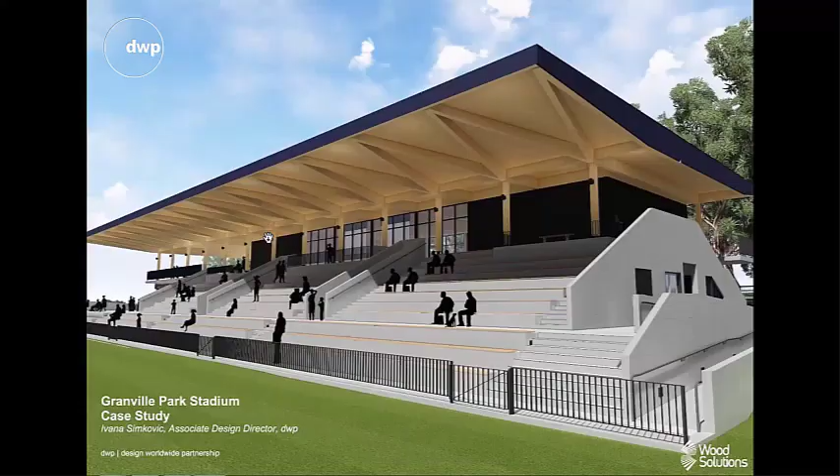Okay, so I will be presenting Granville Park Stadium. The architect is Design Worldwide Partnership. Structural engineer is Northrop Consulting Engineers. The builder is Belmadar, client Cumberland City Council, timber supplier Rubner Holzbau, and completion will be end of this month.

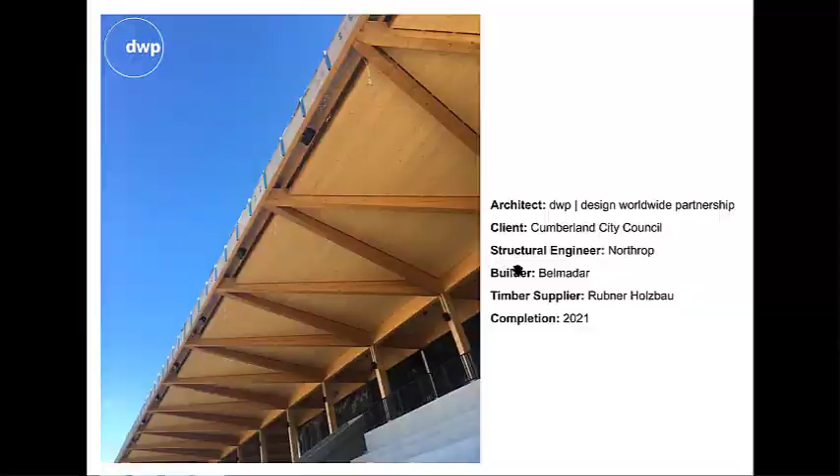Granville Park Stadium, now named the Eric Tweedale Stadium, is situated in Granville, Merrylands area, around 20 kilometres west of Sydney CBD and 2 kilometres south of Parramatta. It is situated in Granville Park between the busy Woodville Road and Merrylands train station, and is considered by Council as a facility that will address the severe shortfall of community recreational facilities in the Granville area.

The stadium is integrated with the existing parks, playing fields, water splash park, shared pathways, and outdoor recreational facilities. The project evolved out of Council's open space and recreational strategy, which determined the need for improved social infrastructure in Granville - an urban requirement for a multi-purpose community facility with flexible space for a wide range of activities and programs.

The project has also been well supported through community consultation undertaken before DWP's engagement. The location for Granville Park Stadium and proposed model briefed by the client meets the best practice requirements for a regional park facility.

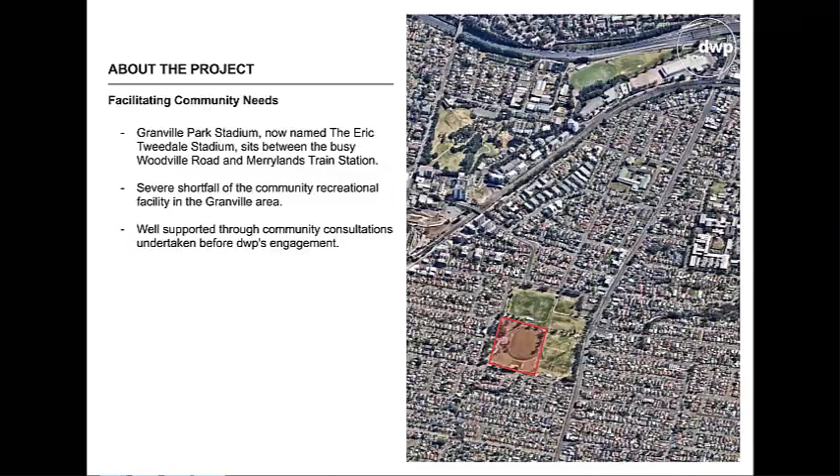Key to design was the facility's connection to its local environment, to the history of Cumberland Plains, and the current context of the site. The Cumberland Plains were also home to several clans of the Darug people.

Aboriginal people feel a belonging to land rather than ownership of it. In Darug culture, individuals also had an obligation to look after the place where they were conceived or born. This includes its plant and animal life.

Depending on their time and place of conception, children were allocated totem animals to respect and protect. Warali Wali, possum in Darug language, is a traditional totem of the Darug people.

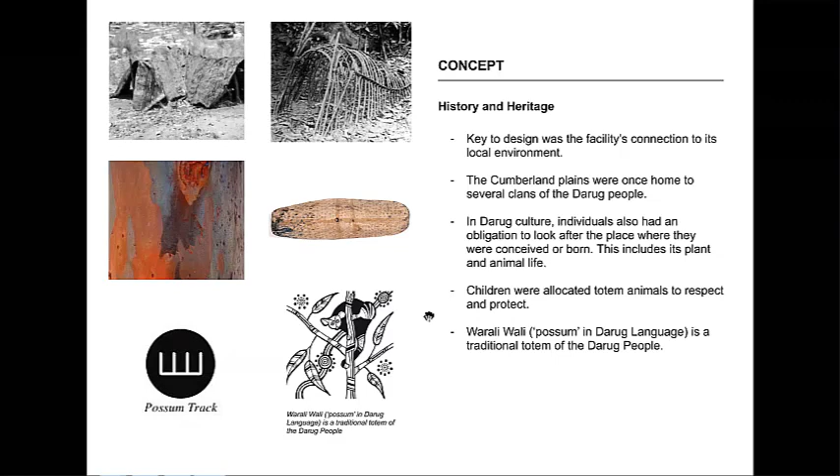The Granville area was widely forested and was a resort for timber getters, charcoal burners, and men who trapped the prevailing native dogs. The original name for Woodville Road was Dog Trap Road.

In the 1850s, the construction of the Sydney-Parramatta Railway brought large-scale deforestation, and much of the usable timber was cut out by 1860.

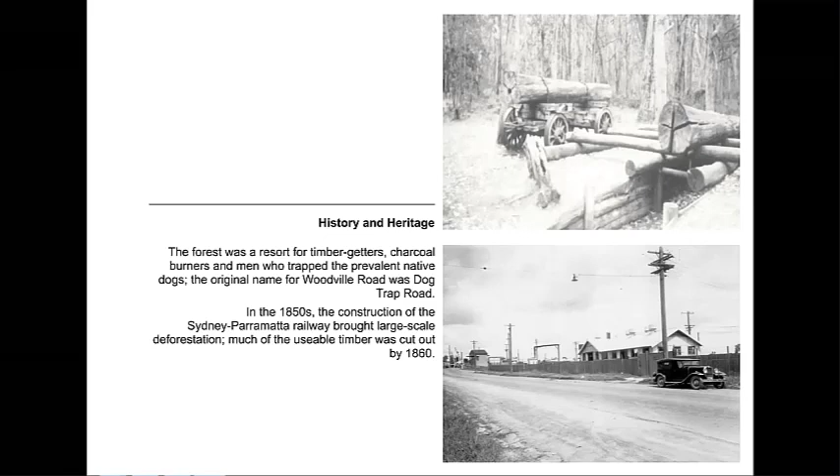Architectural form of the stadium was inspired by the modest nature of Aboriginal architecture, which was a product of a highly complex relationship between the physical and social environment. Also, Aboriginal culture and the totem of the Darug people, and connection to the land that was heavily forested.

Selection of colours and raw materials was inspired by history, heritage and natural look, as well as the building's proximity to massive grey and red gum trees just to the west of the proposed building.

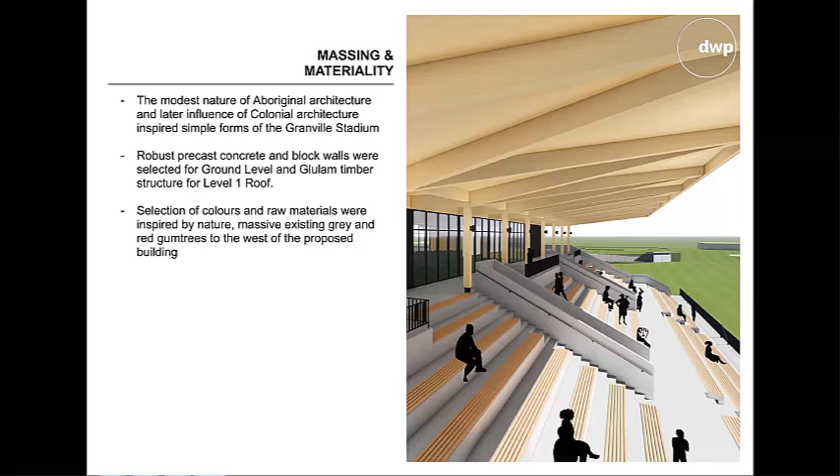A distinctive material choice was the use of structural Glulam timber beams, struts and purlins for the main roof over the 760-seat grandstand and level 1 function space.

Selected for its natural feel, Glulam timber relates to the building's context with its warm earthy glow, softening and complementing the interior materials and making the space more natural and welcoming, appealing to the wider community. The primary engineered timber structure, supported by Glulam columns and beams, is European spruce.

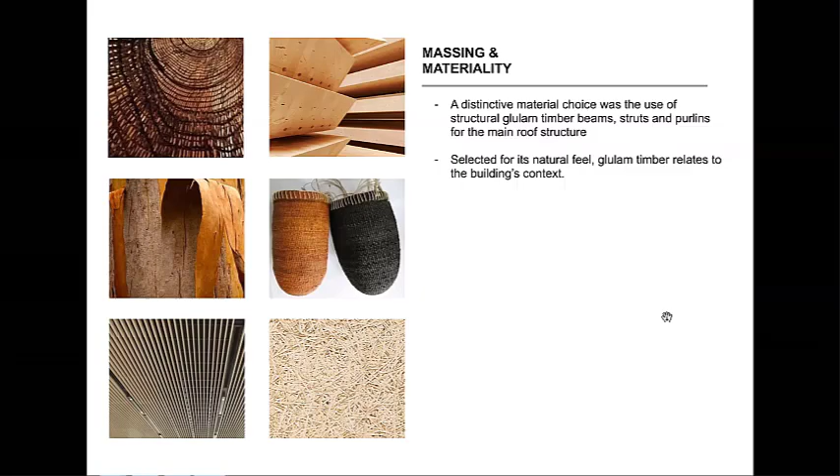Granville Park Stadium is surrounded by car park to the west and north and beautiful established gum trees that sit between the car park and the proposed building.

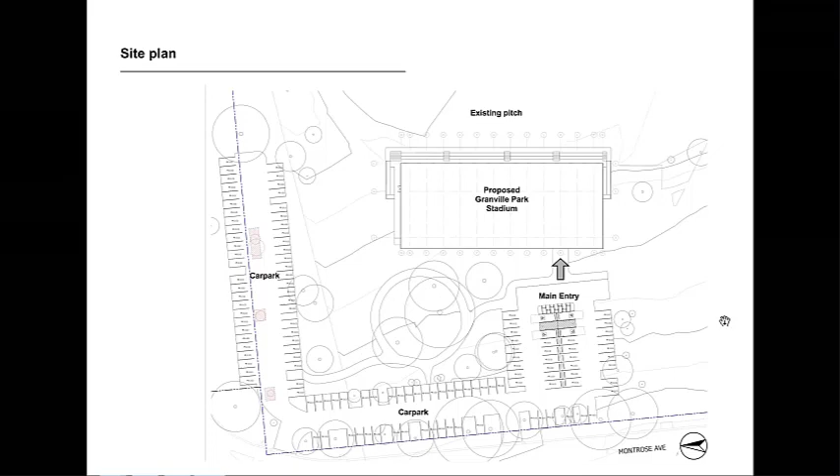Ground floor plan includes 4 unisex change rooms, referee change room, first aid room, admin, equipment storeroom, and public amenities. It also includes a multi-purpose room and canteen. The multi-purpose room will be used as a gym, but also as a meeting room or space for the local community.

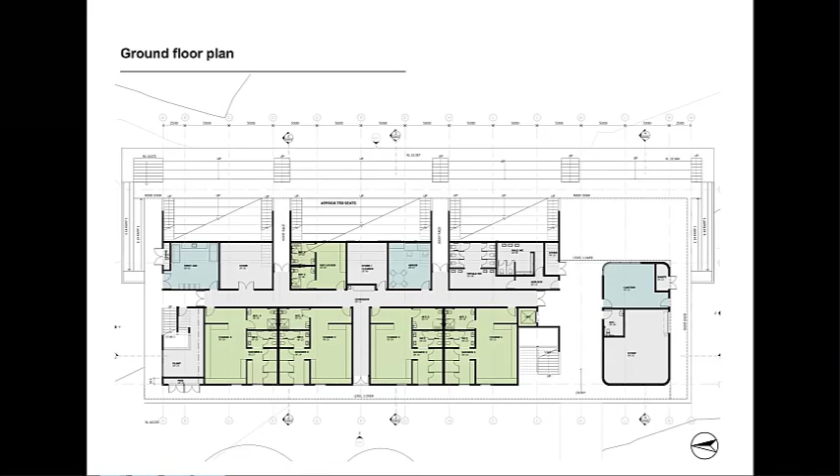Together with Northrop, we looked at different options for the timber roof. Option 1, shown here, had a continuous timber beam and less heavy fabricated steel, and I must say this was preferred by the structural engineers. However, this option was disconnected from the planning of level 1 and was not my preferred option.

Option 2 was a simpler roof structure and worked really well with the planning of level 1, but unfortunately has a considerable amount of fabricated steel at the cantilever connection along grid 2.

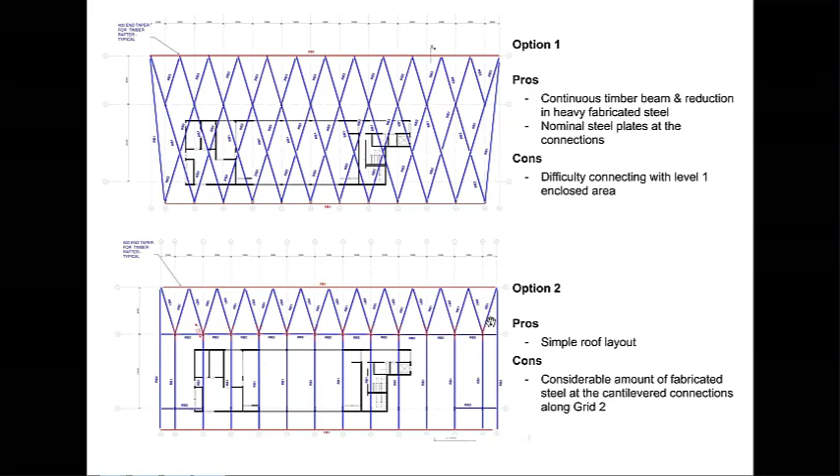Due to production and shipping reasons, Rubner, the supplier, split the project into 3 different phases. The phases were also determined by installation procedure. The first phase was erecting the elements between grid lines 2 and 3, so the structure is stable and braced. The second was erecting the front cantilever after the rest of the building is up.

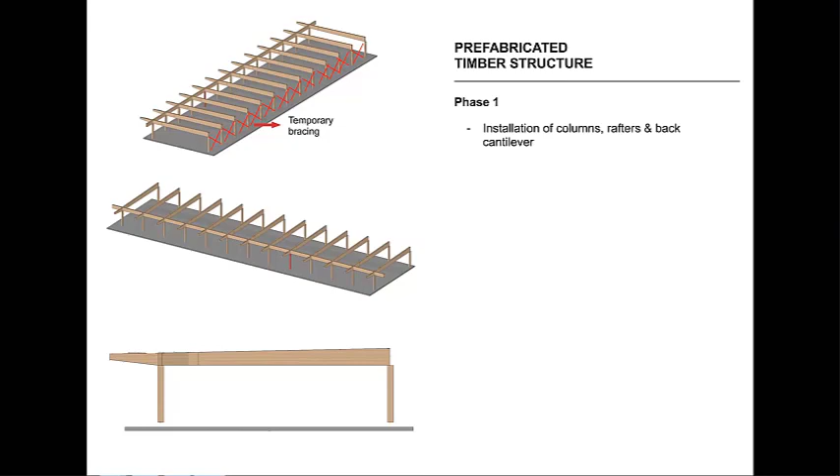Phase 1 showed here: columns and rafters and back cantilever are installed, and a temporary bracing system was also installed between the columns. Phase 1 also included installation of roof bracing that did not interfere with beams along grid line 3. The beams along grid line 2 would be installed only after the front cantilevers were installed.

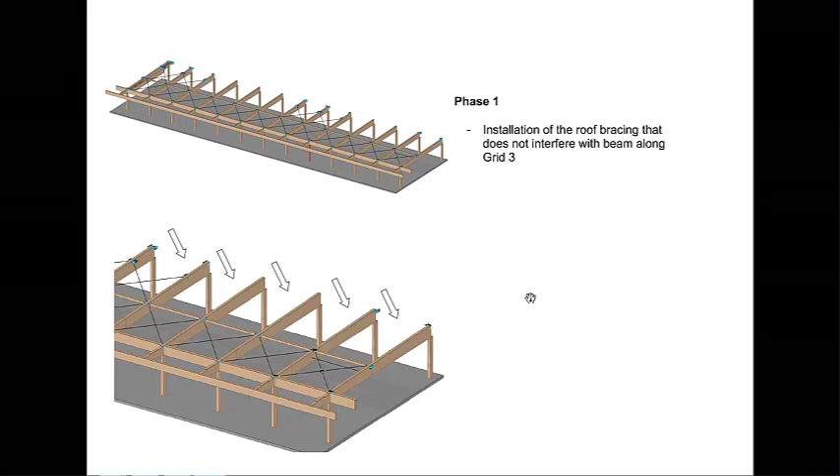Front main cantilevers and roof purlins were installed next, and the front cantilevers were temporarily propped before the timber fascia towards the field was installed, in order to avoid uneven deflection during the installation. Nick will talk about that in more detail after me.

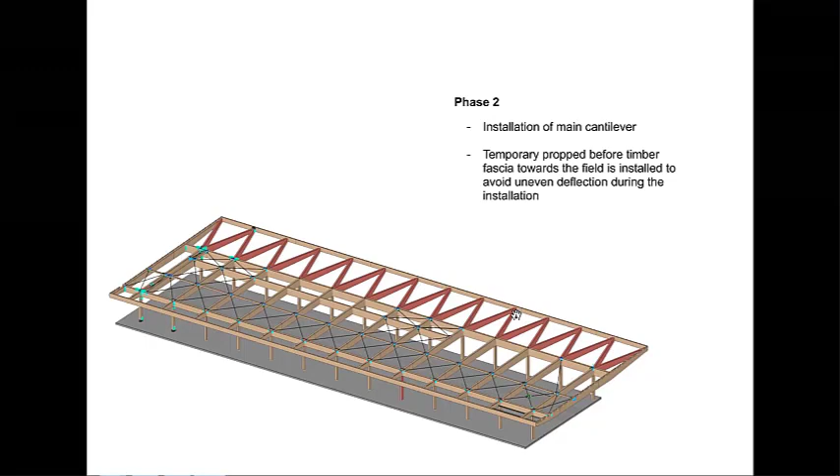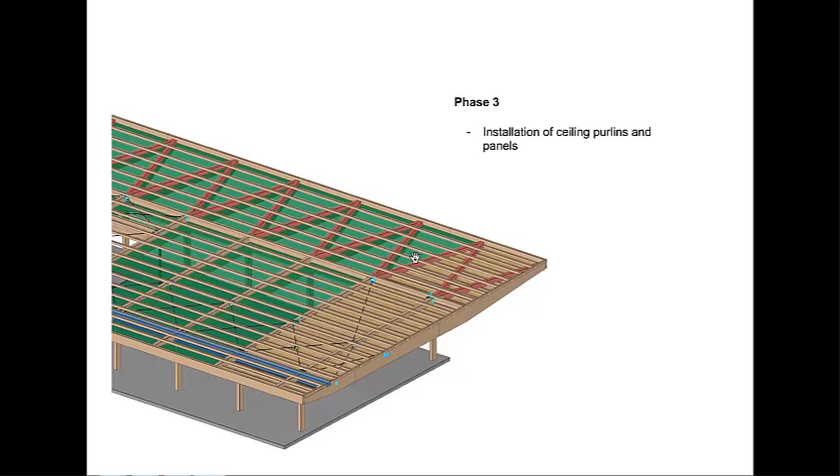After the front cantilever was installed, the beams along grid 2 were installed, and after that the roof bracing was installed. After that, the roof purlins were put up. Then phase 3: installation of ceiling panels and ceiling purlins, which you can see in green underneath.

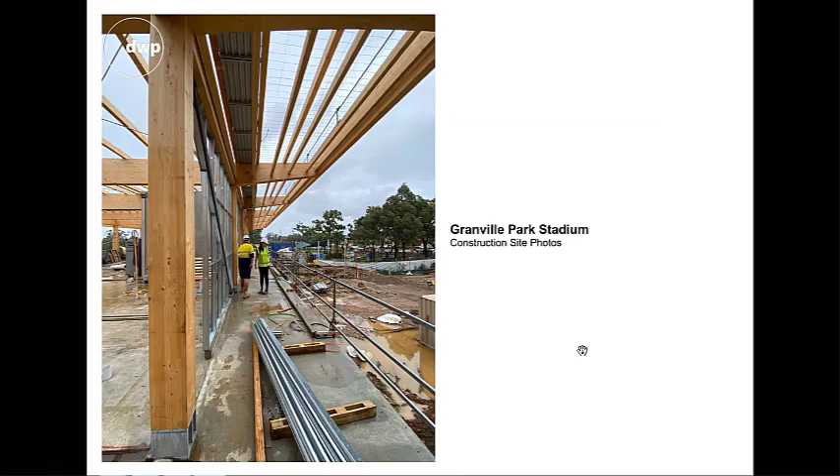Now we'll look at some construction photos. Unfortunately, we did not have much luck with the weather over the Christmas period and in December when phase 1 and phase 2 were on, because of a lot of rainy days. So the drone photos that I'll show, which were supplied by the builder, were mainly phase 3.

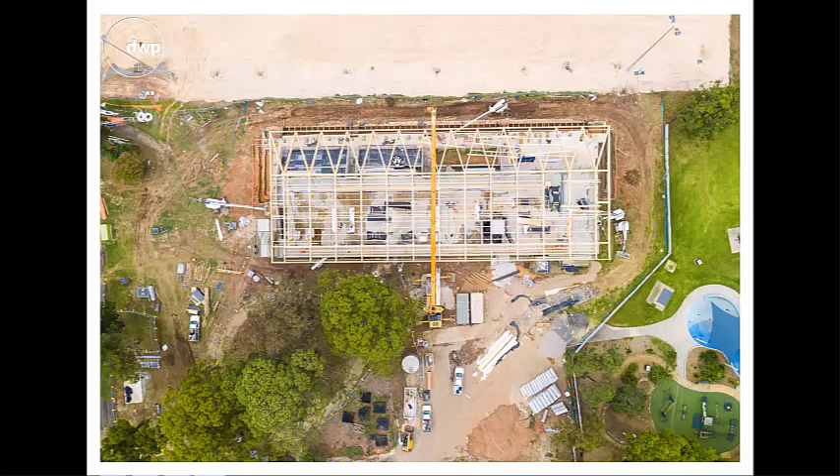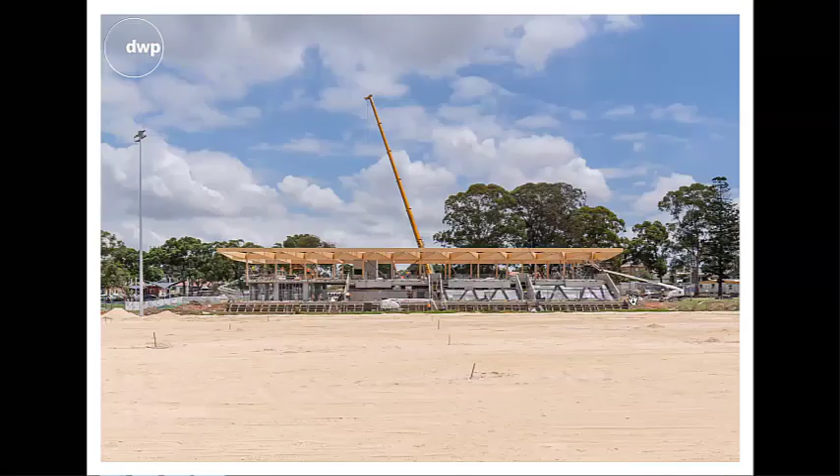Looking from above, that's grid 2, grid 3. So this portion was first installed, and then the cantilever over the grandstand seating. View of the stadium with Parramatta in the distance, and the field. Looking at the construction site from the field side. Installation of purlins.

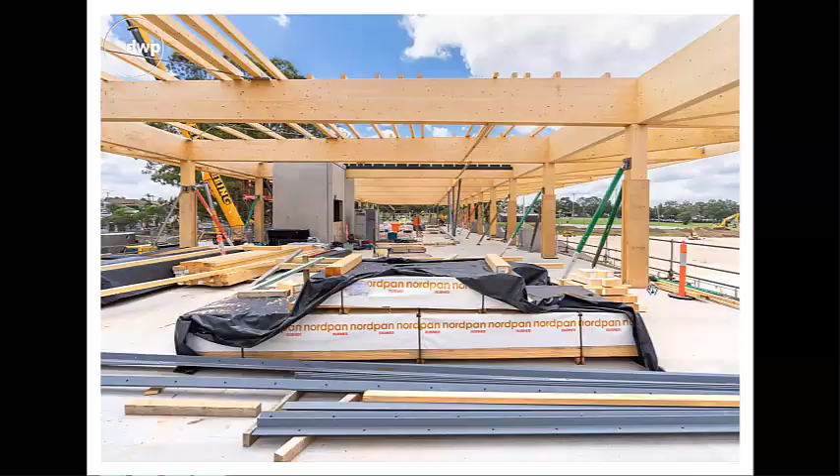As timber columns were also part of the interiors, great attention was made to the design of the columns' steel base at glazing locations, as well as to the steel base for the other columns that are not embedded in walls, so they look different. These are the bases that we have glazing on each side, so we couldn't work with this base because we wouldn't have a steel connection.

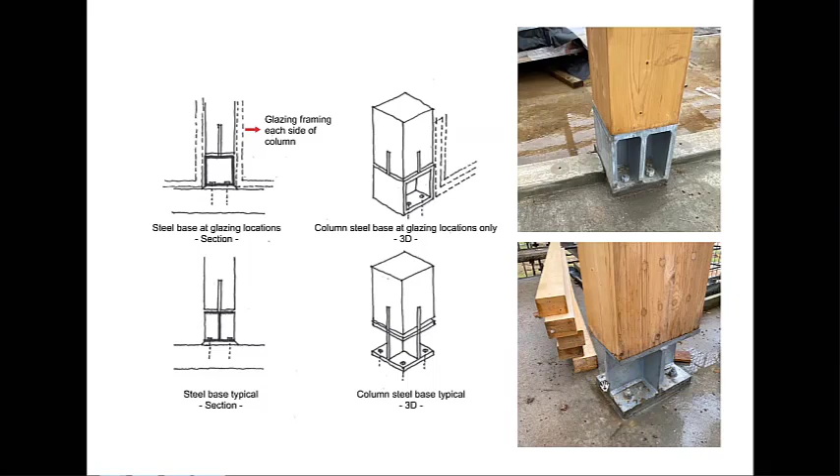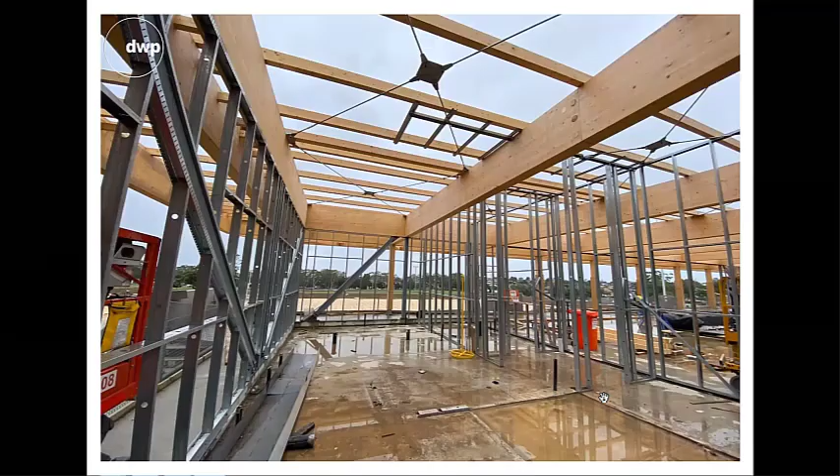Installation of bracing. You can see a lot of water, a lot of rain.

Interior: a warmth and brightness was created by leaving the wood and raw materials exposed. The interior palette is very simple and restrained. Rafters and timber columns are exposed in the interior of a function space on level 1, and raw polished block walls are the final wall finish on the ground level.

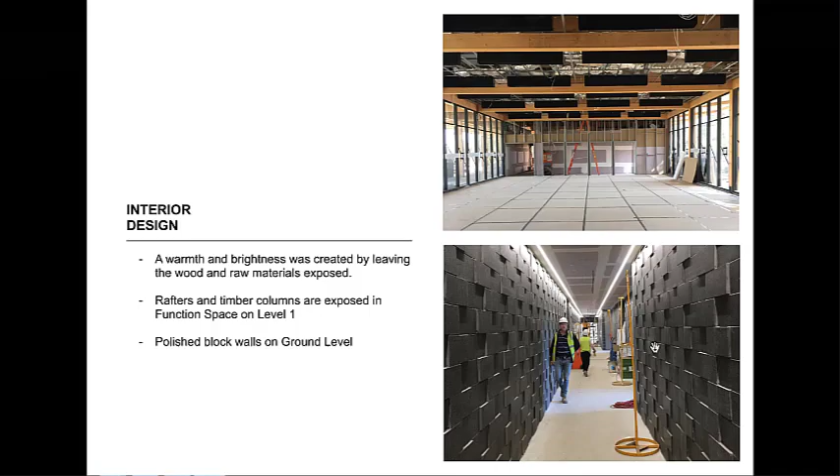Sustainable design was an important objective of the project. The goal was to demonstrate and achieve that this scale of building can be a highly sustainable development that is low carbon, low waste, and highly energy efficient.

The east-west orientation of the building allowed for natural cross-ventilation of the ground level change rooms and passive solar shading due to the large deck and eave overhangs. A rainwater tank was installed underground between the building and car park to provide water for irrigation of landscaped areas and toilets. There is a provision for photovoltaics and metering to monitor and reduce wastage.

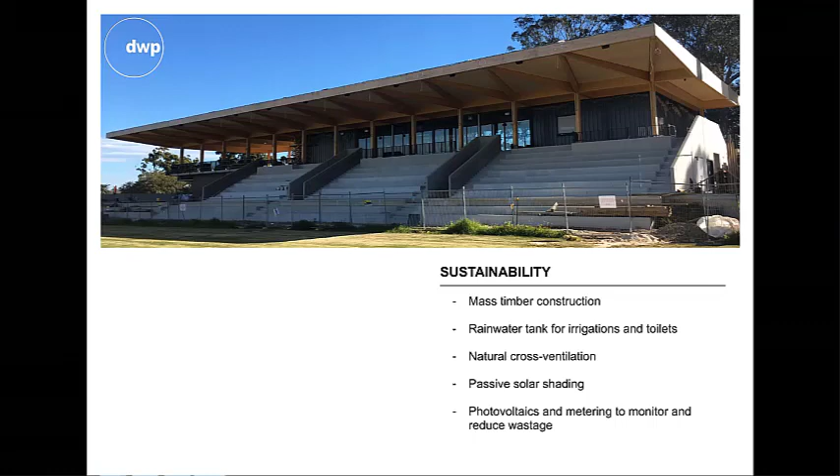Use of mass timber construction for Granville Park Stadium is the first use of Glulam timber for this type of facility in Australia, and represents an impressive achievement in timber engineering. Thank you.

So I'm going to talk about the structural engineering component of this project, and in particular about long-span timber roof structures. A little bit about us first.

Northrop have been working on mass timber buildings for about the last 8 years or so. That started with us peer reviewing the International House building in Barangaroo, which was done by Lendlease. We learned quite a lot of good lessons from that and really developed a passion for working with mass timber.

Since then we've built 2. The Carlton Connect Institute in Melbourne is a 5-story office building with a sort of semi-open childcare facility, the first childcare facility in a timber building in Australia, and that's underway at the moment - we're just completing the fit out now. The Honeysuckle building is a 4-story commercial building in Newcastle, the first there, and we're just finishing that off as well. I think the keys have just been handed over.

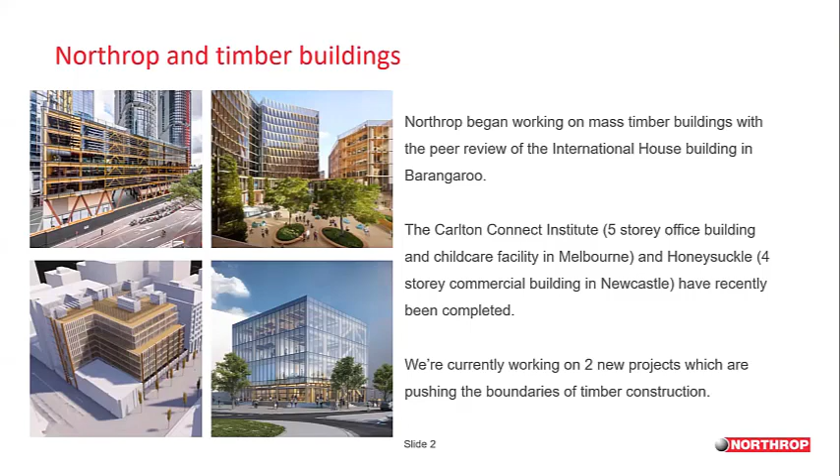We're also working on 2 new timber projects that are pushing the boundaries of timber construction. One is a very large office building in Melbourne that will have one of the biggest timber floor plates going around, about 2,500 square metres over 8 levels. The other is a timber steel concrete composite, which some of you may know as the Vrede Strong Floor system.

This sort of work with timber building is really in line with our company values on carbon neutrality and climate resilience. So we've made these goals in line with our declaration with the Engineers Declare climate emergency declaration. We're aiming to be advocating for carbon neutrality by 2022 on every project. We'll make it our design philosophy as default by 2025, and we'll be aiming to have all of our projects designed to be carbon neutral by 2030.

We offer all disciplines, and while these three have fairly significant operational requirements for actually operating a building, in terms of structures, as most of our energy is in that embodied material state, I think timber buildings really play a huge role in this commitment, both for us and for the industry. There's not really a better way to achieve carbon neutrality than by designing and building timber buildings.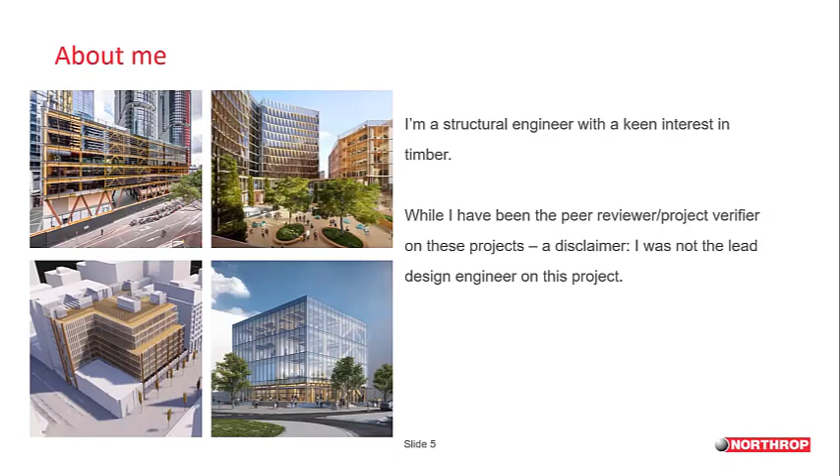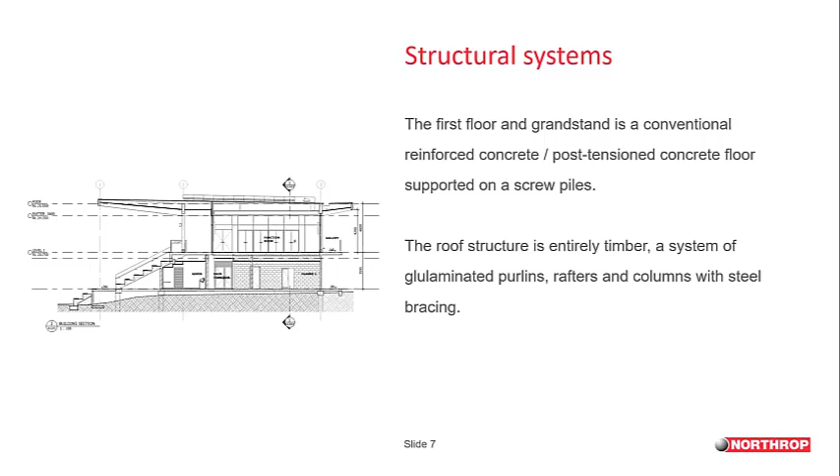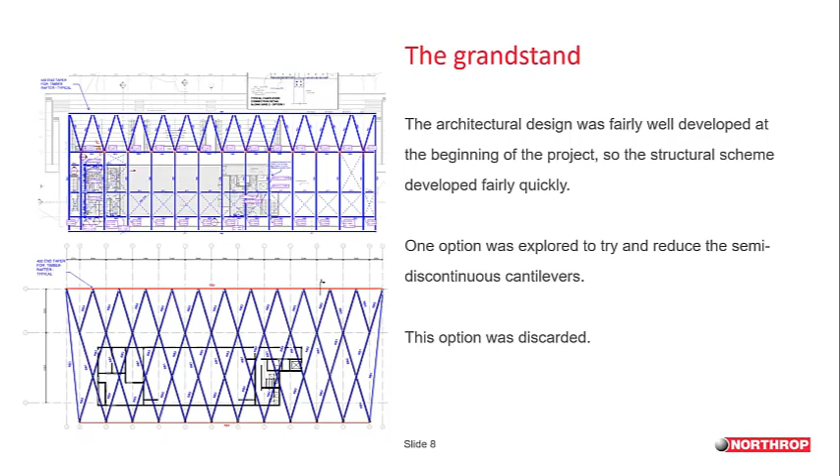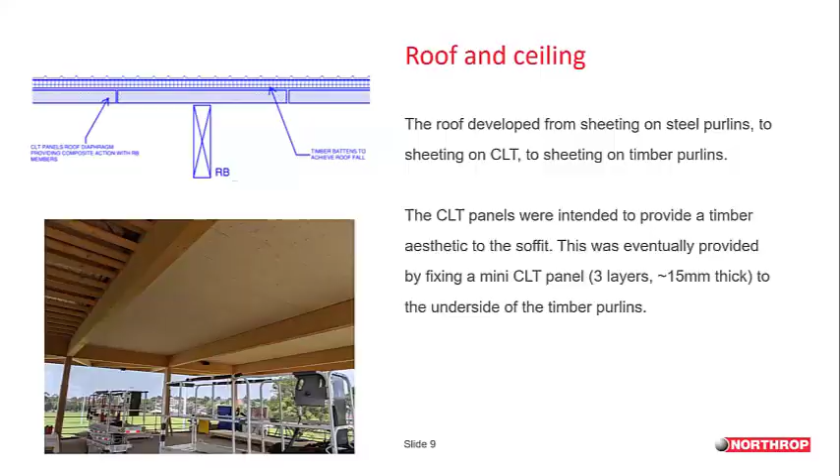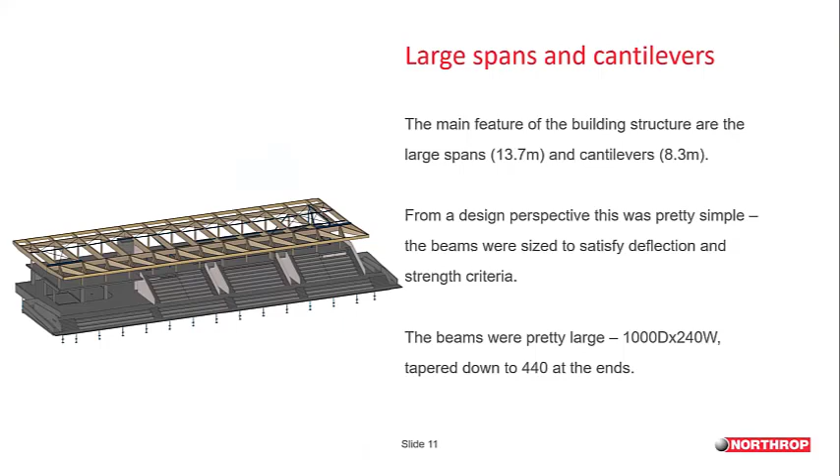Structural design challenges - really the main one, which is probably fairly obvious, is the large spans and the cantilevers. It's a pretty significant feature of the building. The large internal span is 13.7 meters and has a cantilever of 8.3 meters, measured perpendicular to the main span, so it's actually a little bit longer when you take into account the angle of those beams. But from a design perspective, or a member design perspective at least, it's pretty simple. The beams were just sized to satisfy deflection and strength criteria - nothing particularly unusual there. But they are pretty big as a result.

They're about 1,000 deep by 240 wide, and they taper down to 440 deep at the ends. So they're pretty big timber beams.

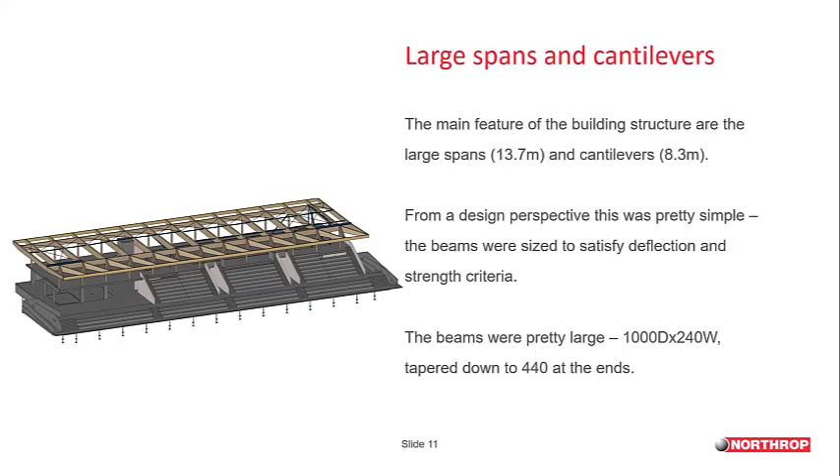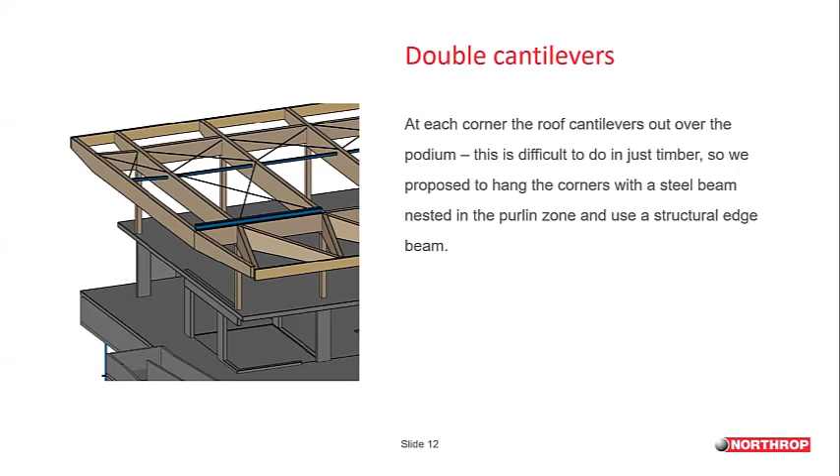But as we'll see later, that was actually removed. The other challenge was the discontinuous cantilevers, meaning having a splice in the high negative moment region, where the stresses are greatest, right over the top of that column, having to splice in two members instead of just running that main primary beam straight out over the cantilever. That's what I'm referring to as the discontinuous cantilever.

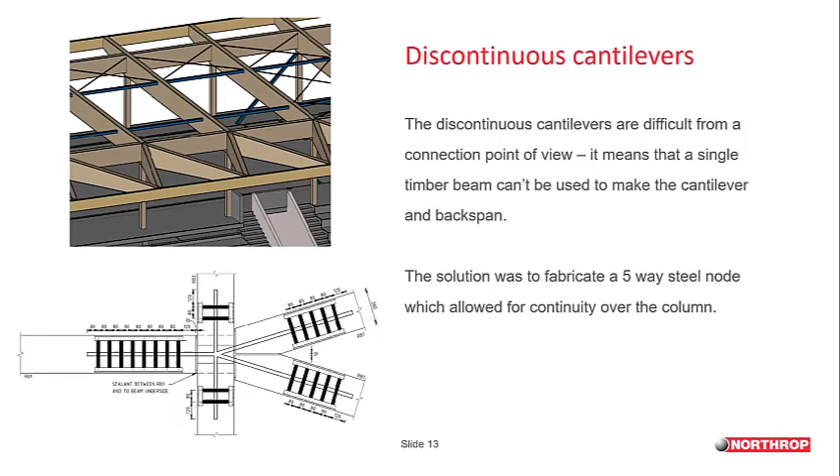As with all timber projects, there are always questions about durability. This was solved basically by providing flashings to protect timber from direct wetting. So the timber is exposed on the underside, but on the edges of the building there are flashings that come off the roof and down to protect the timber from rain.

And at the base of the columns, they're protected by the large cantilevers. It's not going to get a lot of wind-driven rain coming in that far, and they're raised off the ground by galvanized steel feet. That protects water from coming in along the slab and up into the end grain, which is the most vulnerable to damage due to wetting. It also provides some termite protection.

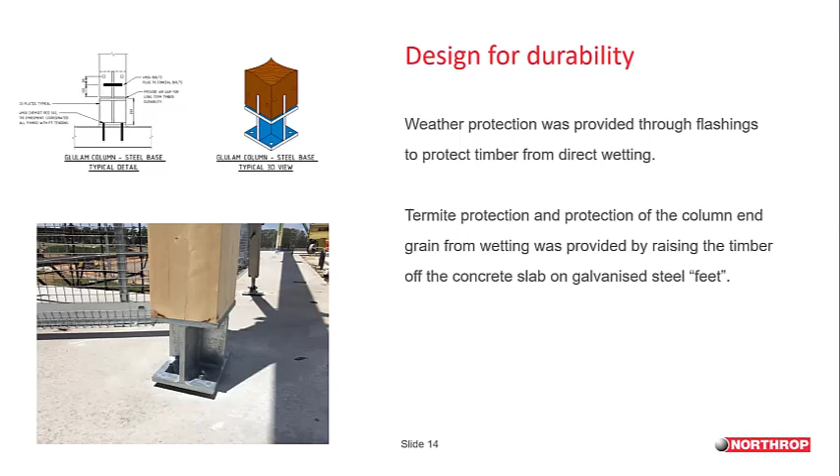So best practice is to take all the timber up one story at least, if you've got a timber building of this size. But in addition to that, these exposed galvanized steel feet just give a really clear observation mechanism for the timber, or for termite trails if there are any.

So the project started with local supply, and it was developed with local supply, but for cost reasons it became apparent that we were going to get a better price going international. So through the local agent for Rubner, which is the Fascia, the supply of the Glulam changed to Rubner, based in North Italy.

They then took on the project and completed the detailed design, produced shop drawings, and we peer reviewed that in a fairly rigorous manner, more than you would do for, say, a locally certified project, because we were the eventual certifiers of the roof, and we certified that design.

So a couple of things changed in that process. Rubner optimized the cantilever connections. What I spoke about before with that 5-way embedded steel plate was changed at this point into this design. I guess we were providing a design that was fairly conservative from a cost point of view. This was an optimum design, and you can see it here being all fairly aligned with the philosophy of doing as much in the factory as possible.

So these steel plates were embedded into the timber beams, one for each incoming timber beam. They were embedded with a significant number of dowels, I think 16 on the top and bottom, just to hold that plate in. And then it really turned what was a fairly complicated carpentry process of installing all of these bolts into the timber into what was really more akin to steel erection, putting everything up and doing up some tensioned bolts.

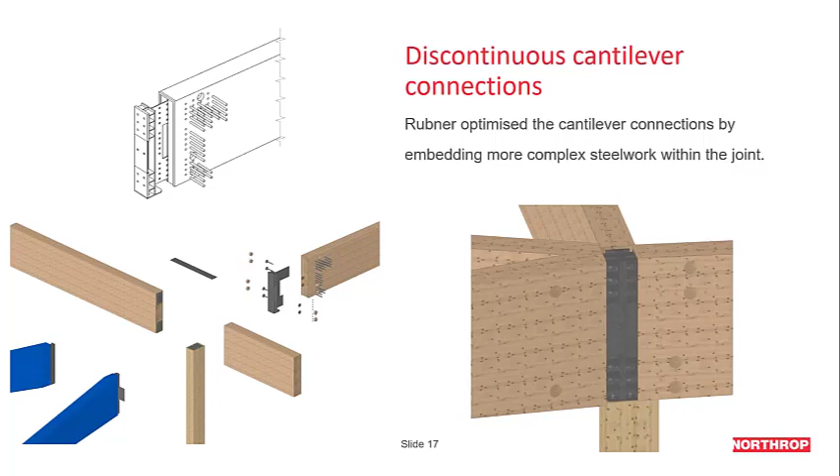The double cantilevers were also changed. Instead of hanging a beam over the top and hanging the cantilever off that, the option was instead to put in a steel plate over the top and screw it down.

There were some issues with doing this in the eventual building, just due to manufacturing tolerances. It required there to be a full bearing connection at the bottom of this cantilevered timber beam, which is actually quite difficult to do with timber because there are 2 millimeter tolerances allowed everywhere, just for variability in the actual fabricated size.

So it ended up being that once this was installed, it just drooped a little bit until that tolerance was taken up. There was a bit of adjustment needed in this connection to try and shorten the length of this strap to take up the 2 millimeter tolerance in the end of that beam. But it was a good solution in the end, and it worked pretty well.

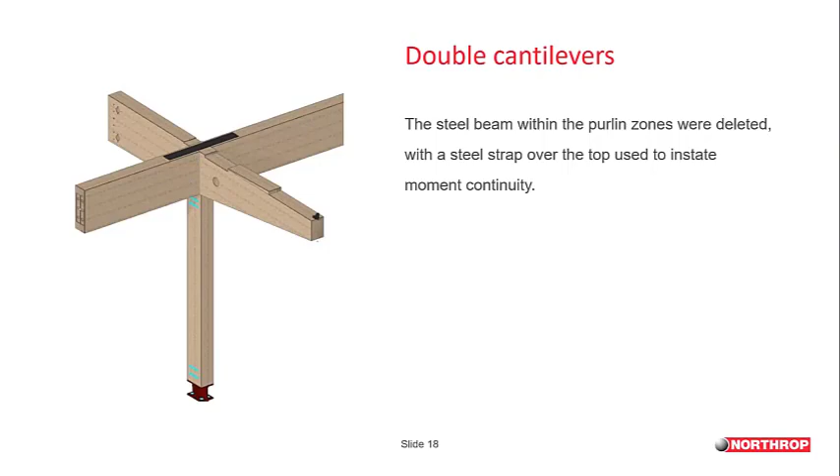Due to limitations in container length, the original beams, which were designed as continuous over 13.7 meters, that's fairly achievable in Australia in terms of transport length. But once it was being shipped in from overseas, transporting something of that length becomes quite costly because it needs to live on the top of the container ship. Whereas to fit it inside a regular container, the beams were all spliced.

This was a splice connection that was used, similar to the other connections. It's some embedded steel plates that's all done in the factory, and then when it comes to actually putting it together, it's just a couple of simple bolts.

Because it was located in a low moment region, it was fairly intelligently located away from that 5-way connection, so the number of bolts was actually quite small—you can see it's only 3 bolts there. That doesn't achieve the full capacity of the section, but the moment in that area is really low. So that's something that needs to be considered when designing timber splice connections, because it is quite difficult to splice something to the full capacity of the beam.

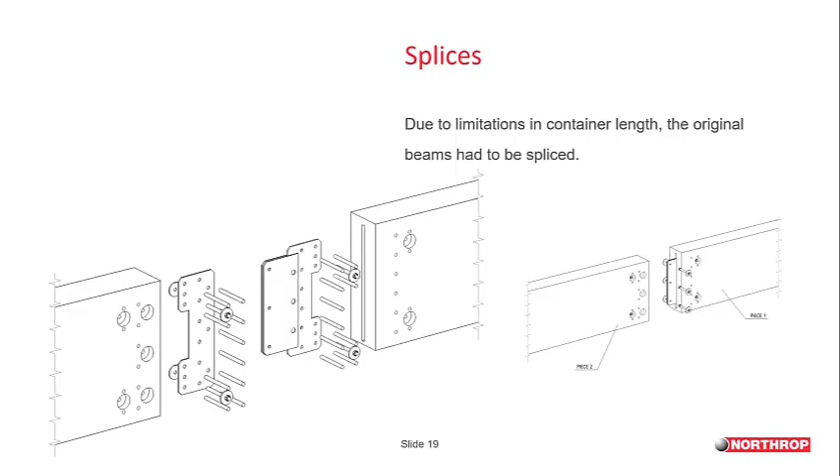Certification then became fairly tricky because the structure has to be designed and certified against the Eurocode. This is due to a number of reasons, some fairly minor. The timber supplied was European species of softwood to European strength standards. You can use other species of timber within AS 1720, but that requires quite a significant amount of testing, so it was more straightforward to just use the Eurocode and the strength standards embedded in that.

A fairly simple limitation of AS 1720 is that it doesn't allow for screws larger than 7.5 millimeters in diameter, and it doesn't allow for smooth dowels. It only allows for bolts and coach screws.

That's because it applies a more test-based or empirical-based method for the design of connections, whereas the Eurocode moves back to first principles and allows for screws of any diameter, smooth dowels, and other different types of connections. Due to those limitations, we had to use the Eurocode, which meant we needed to prepare a performance solution to prove equivalence between 1720 and Eurocode 5.

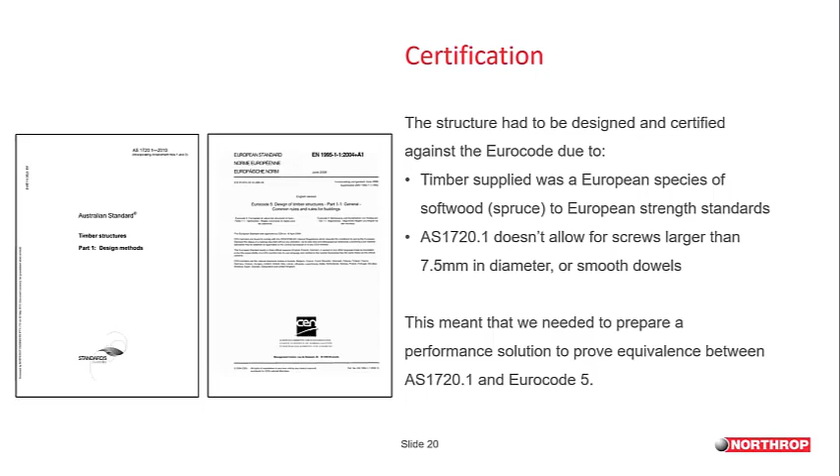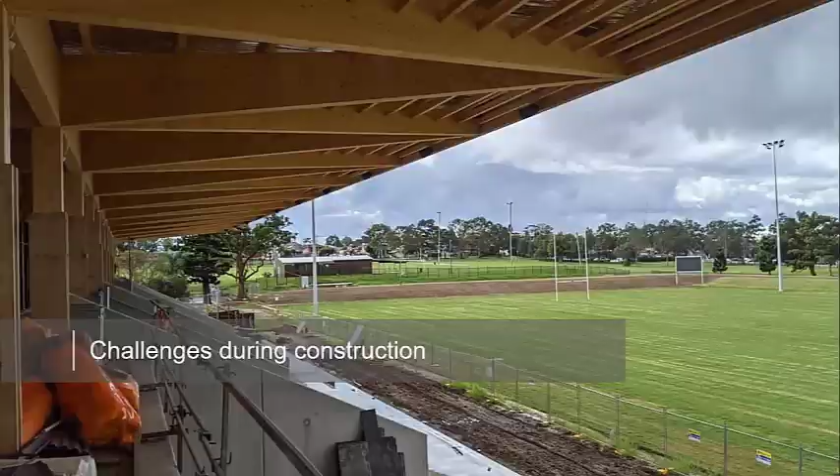A couple of challenges during construction—there weren't really many, it all went together pretty smooth. The temporary stability engineering was carried out by the timber installation contractor, which was Savcon. They did an excellent job putting this building together, and basically didn't have any issues at all.

The temporary stability engineering was carried out by their engineer, but there was a request to not prop the end of those cantilevers that stick out over the grandstand. So we had to go back into our model and analyze the roof structure with only one of the beams installed, which resulted in a pretty significant amount of deflection until the other one was installed and balanced the whole system out.

It was just designed so that only one needed to be installed at a time. It induced some bending into the column below, but that was all fine.

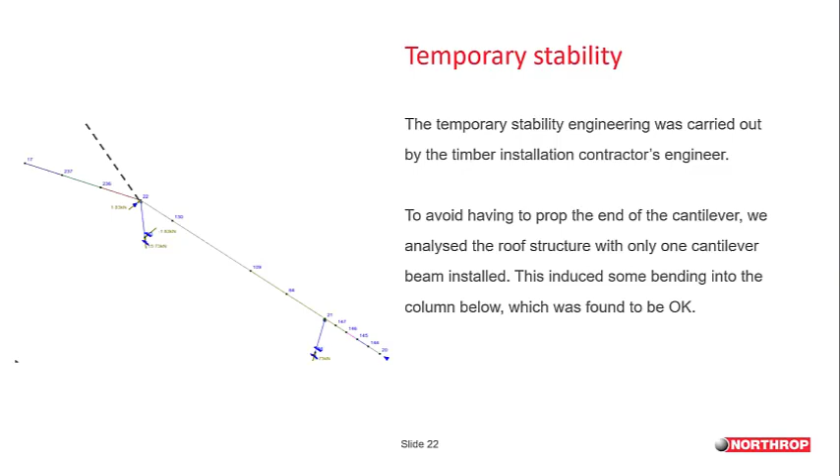And the last one was timber checking. So checking is a natural phenomenon in timber. It's caused by differential shrinkage due to drying. When timber starts to dry, it dries more on the outside and starts to shrink, and as a result it just results in what appears to be a crack opening up from the outside of the timber to the inside. This effect is fairly limited in Glulam because it's made up of a number of different pieces glued together.

So each of those pieces will try to check in and of themselves, but it's very unlikely that a check will align between multiple pieces of timber and actually cause anything bigger than a 5 to 10 millimeter deep check. So it usually doesn't really present a structural concern in Glulam because of that reason. It doesn't go very deep.

I recently went out to a heritage building that had ironbark columns about 300 mil by 300 mil as single members, and they had checks in them that you could put your hand into. They were pretty large. That doesn't actually happen with Glulam.

If it does go deeper than about 15% the width of the member, that's when it should really be reviewed structurally, but it's fairly rare for that to happen. It does seem to happen just prior to handing over a building though. It's just one of those Murphy's Law type situations, which means my recommendation is really to get this understood by the building owners and the builders before commencement of the project, because it is a naturally occurring phenomenon. There's nothing you can really do about it.

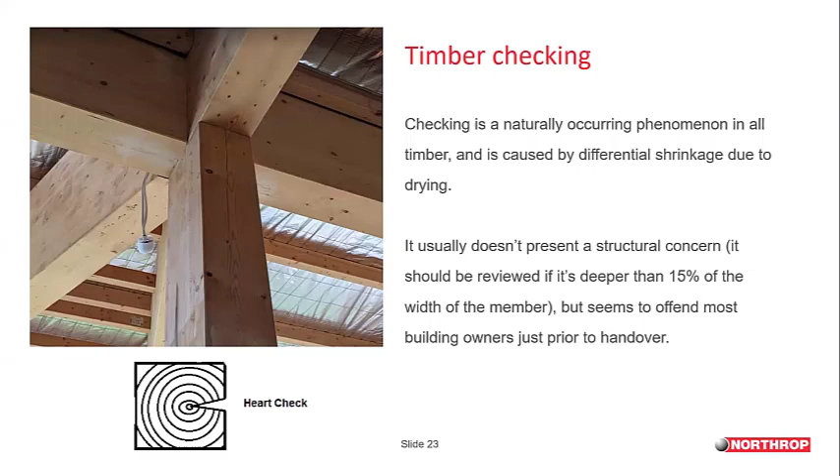Even fixing it is fairly challenging. If you go and fill that check up with some kind of brown coloured putty, as it continues to shrink and swell during the seasons, you'll end up with that stiff material inside actually making some of the checks even bigger and potentially causing an actual structural issue. So it's challenging to fix, and it's something that just needs to be understood as the way that the building performs.

So that's a photo of it. We're very proud to have worked on this building. As Ivana said, it is the first of its kind, and it is something that we have advocated for, in getting Rubner involved and really pushing to get this project built in timber. We're immensely proud that it's been done, and are very happy with the result.

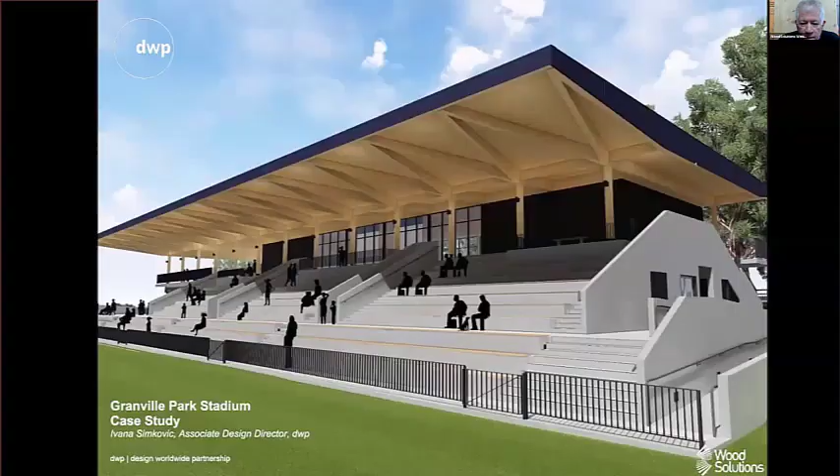I'm going to ask a question to both Ivana and Nick, and you can answer together. It's just a bit more on the involvement of the timber supplier, so Rubner. How do they help in the process? Because obviously you've done a design stage, so what was their value or assistance they gave?

So they got involved after, I suppose, all the members were sized and all the connections were detailed, and that was really done for tender, because those details make quite a significant difference. But at the end of the day, they have an office in Italy that really only produces timber engineering, mainly timber buildings and timber elements. So they are experts in the field. As a result, they come along and provide a lot of guidance in terms of appropriate sizes for members. They will check everything in accordance with the Euro codes. And in addition to that, probably the main element is that it's all within the capabilities of their machinery to produce something that is cost effective.

They know all of their CNC machinery back to front. They know what it can do and what it can't do. So I think it is a fairly essential part of the timber project to get involvement from the suppliers. And the earlier involvement is probably going to give you a quicker path to the final design.